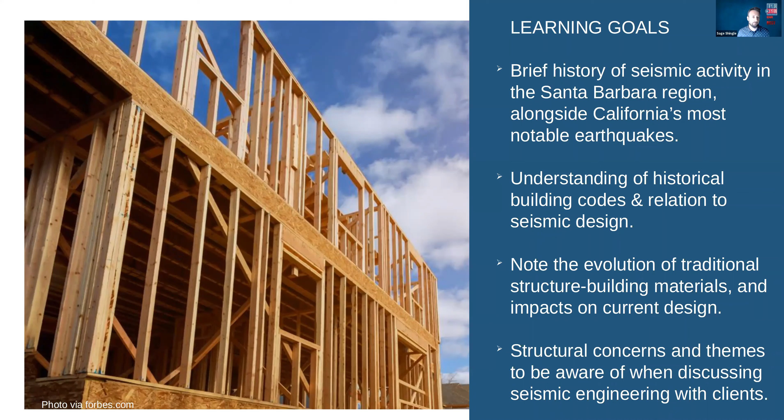So, history of Santa Barbara earthquakes, building codes, and how it can apply to your next renovation project. We'll talk about Santa Barbara earthquakes in particular, and then California's most devastating earthquakes, and how that relates to historic building codes and moving into current design, and what that's done with our building materials over the years. We'll concentrate on residential structures because there's a ton of different things we could get into, but for the sake of this, we're going to simplify and just do residential. And then just some things to be aware of and think about when talking with clients or thinking about your next renovation project.

So just a bit about me. I grew up here in Santa Barbara. I went to San Marcos High School. I went on to Cal Poly San Luis Obispo, got my degree in civil engineering. From there, I moved down to San Clemente and worked for about 4 years doing primarily, like 90%, school work. After that, I moved up to Seattle. I did quite a bit of different interesting engineering work up there. I still did a lot of schools, public projects, some large high-rise buildings, some docks, all sorts of different kind of interesting and fun stuff. While there, my wife and I also had 3 kids. About 5 years ago, we moved back to Santa Barbara, so now we're here building bamboo structures on the beaches across the area.

Throughout the last 14 years, I've been involved with this ACE mentor program. I'll touch on that a bit later, but tuck that away. And I need to acknowledge Kate Robinson, who was an intern for us this summer out of our Pasadena office. She goes to Cal Poly San Luis Obispo as well. She's doing architectural engineering, and she did the heavy lifting in terms of putting together this presentation and finding great images, and a lot of the work that she did. So I definitely have to give her some acknowledgement and thank you.

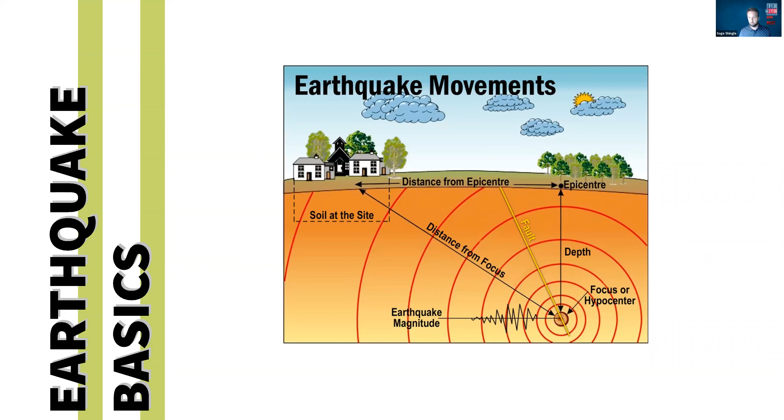So the couple different ways that people talk about earthquakes are the Richter scale, which is generally what's reported in the news, and then this modified Mercalli intensity scale, which is how geologists and engineers track the intensity. In general, in that 3 to 4 range is when you start to feel earthquakes. Below that, you don't even notice they're happening. And then we get up to the 5, 6, 7, and you start to see some damage. Obviously, the higher we get, the more damage you get, the more shaking.

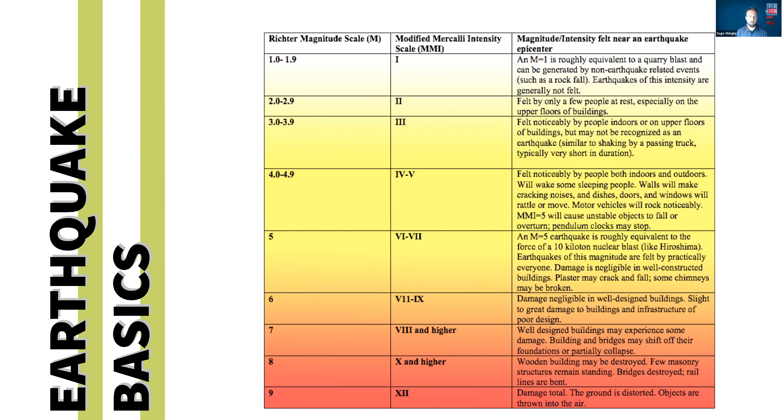Looking at this, there's a couple things that are a little bit misleading or difficult to understand about earthquakes. One is this magnitude on the left, that's the Richter scale. As you go up a notch every time, from a size 2 to a size 3 to a size 4 to a size 5 — a 3 is 10 times the magnitude of a 2. Going from 4 to 5, a 5 is 10 times the magnitude of a size 4 earthquake. That's actually physically the magnitude of the seismograph as it monitors and records the shaking.

And then on the right-hand side, you've got energy release. So energy release, just to compound things here, is that every notch up the Richter scale, you actually increase the energy released by 32 times. So going from a 3 to a 4, you're releasing 32 times more energy. Essentially, as we get up that ladder into those high 6, 7, 8 earthquakes, the amount of energy is a lot.

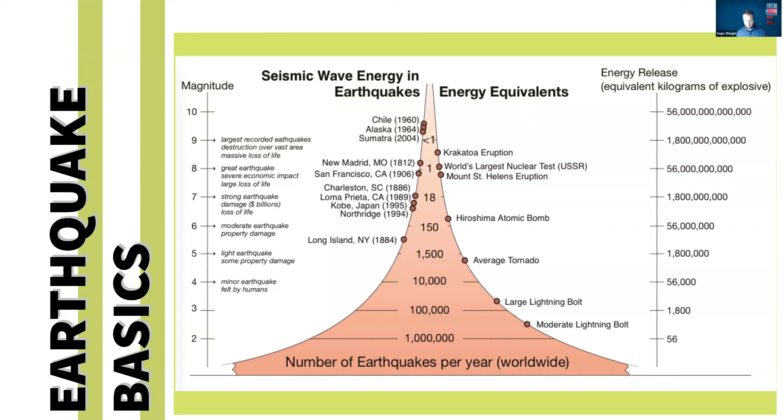So in big, global terms, everybody's heard of the Pacific Rim and the Ring of Fire, and this is the concentrated area where the majority of earthquakes happen across the world. In terms of California, we have the big Pacific Plate bumping into the North American plate and sliding.

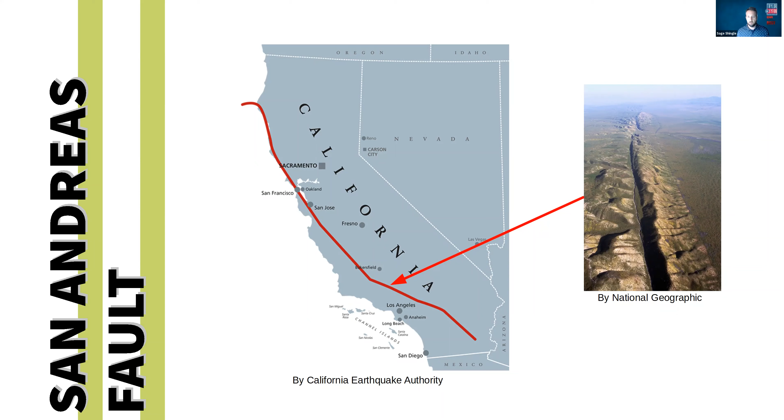So that's just one of many faults across California. We'll zoom into Santa Barbara in particular. Here's a few fault lines through Santa Barbara, and you can see they're scattered all over. They're not all active — some are potentially active, some are not seen as active, but there are certainly some in the region that are currently active. In seismic geology, anything within the last 10,000 years, any knowledge of ruptures within that period, is considered an active fault.

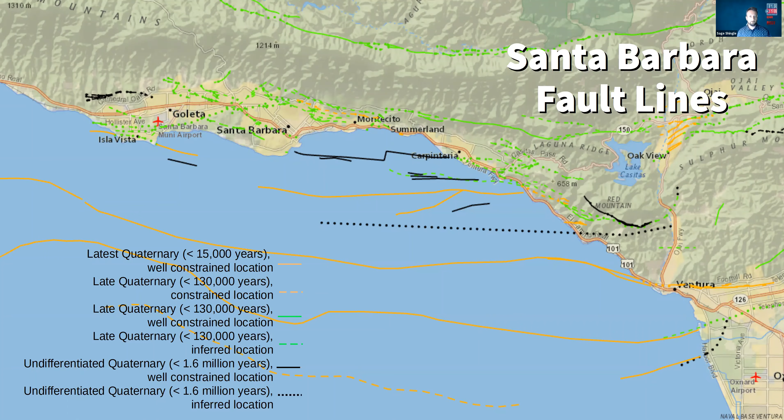Here's a few more in Santa Barbara. Zooming in a little bit closer, you can see that Santa Barbara in general — all the topography we see, the mountains, the hills, the Mesa and More Mesa — has been caused by long-term movement of the earth. So some of those hills and valleys we see, shown in green and yellow, are the anticlines and synclines of the soil and rock, and then red are faults across Santa Barbara.

And again, not all of these are active. One that is active is the Mission Ridge Fault, which is just up the top of the screen, MSR. And the last known earthquake there was in the 1700s.

One important takeaway is that all of the faults around Santa Barbara have a certain length, and that length and the potential for rupture dictates what size of earthquake we can expect. With a length of about 10-12 miles, the Mission Ridge Fault could generate roughly a 6.5 magnitude earthquake. There are other faults off-screen that can generate earthquakes in that same range, up to maybe a 7.5.

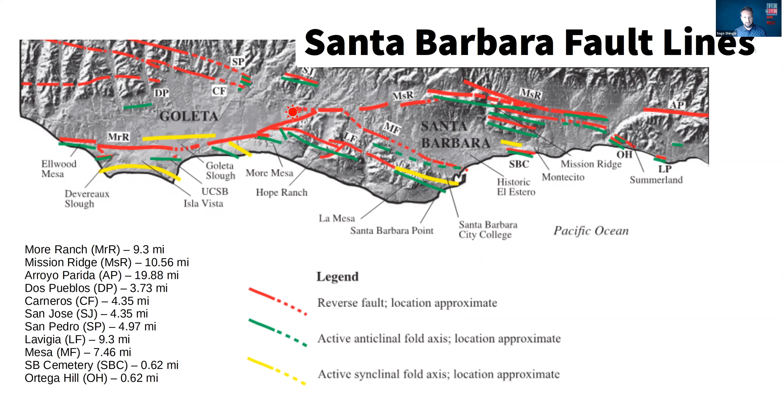Other things that are important for any of you I recognize - when you see me walking around with my wife, that star that just dropped, that's my home, so we're close to some faults or potential faults. When you see me walk around with my wife, don't mention it - it's easier that way, so she doesn't have to worry about it.

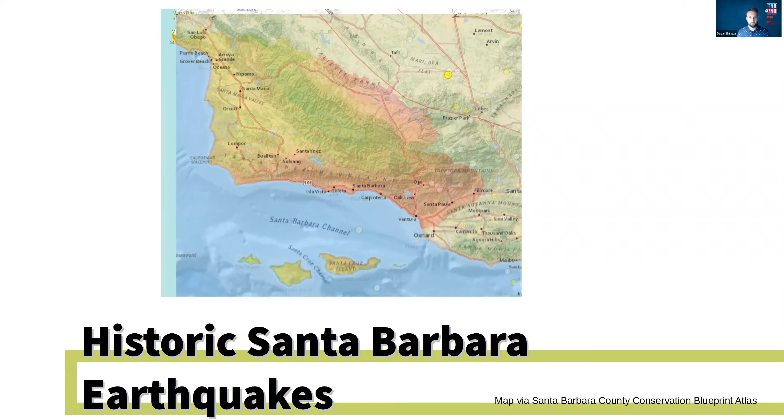Going back to older earthquakes in Santa Barbara, we have the 1812 earthquake. Before anyone jumps on me about the photos not being from that era - if you're an architectural historian - these are from more recent photos because not as many people had their phones out to document everything in the 1800s, imagine that. What was around at that time were missions across the coast. La Purisima in Lompoc got more or less completely destroyed - they actually moved and rebuilt on a new site. The Santa Barbara mission had damage, Santa Ynez mission had damage, the Buenaventura mission had damage.

Taking the swath of damage and doing some back-calculating, they found that this earthquake was in the order of 7.1 magnitude.

The big one we all know about here in Santa Barbara is the 1925 earthquake, and this is significant for a couple of reasons. Architecturally, it reformed the way we think about Santa Barbara now. It was also one of the triggers to start considering seismic design in the Uniform Building Code.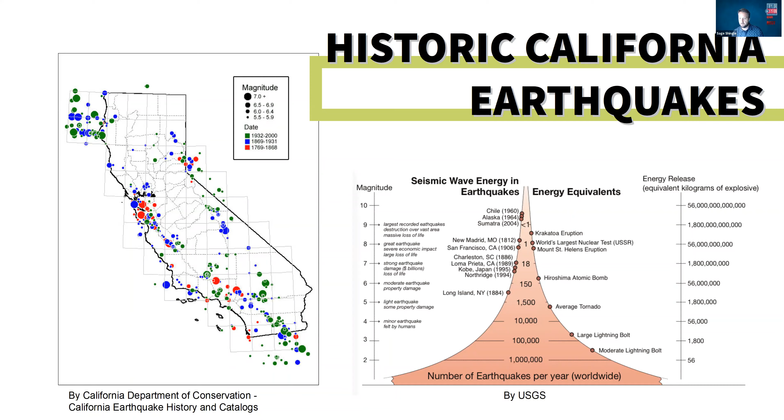So just real quickly talking about seismic design factors, we start to realize all of these different things are important. How much does the building weigh? What type of lateral system is supporting it? Where is it located? How close to faults are we? And then an importance factor, as we recognize the importance of those other things, or recognition that we need to take care of specific buildings, whether it's an important infrastructure project, an emergency medical office, a hospital, or an ag building.

So history of seismic design, we're going to strum through this pretty quick. 1906 San Francisco earthquake, 1933 Long Beach earthquake, 1935 UBC, and actually the 1927 UBC, which is just after the Santa Barbara earthquake. The 27 UBC was the first time we actually mentioned seismic design, starting to think about it in terms of a weight and then designing for a portion of that weight as seismic.

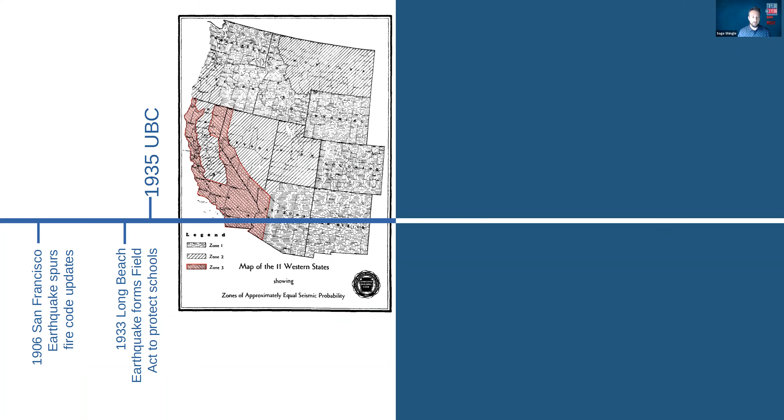So 1935, this was the first seismic map that we had, showing in red there, pink, zone 3, which would be the high zones.

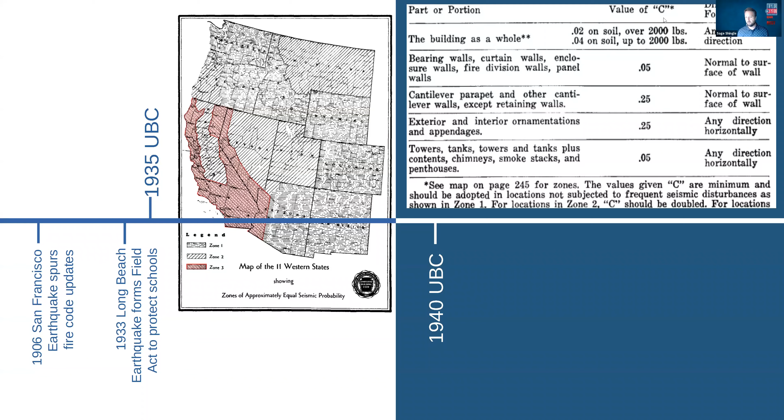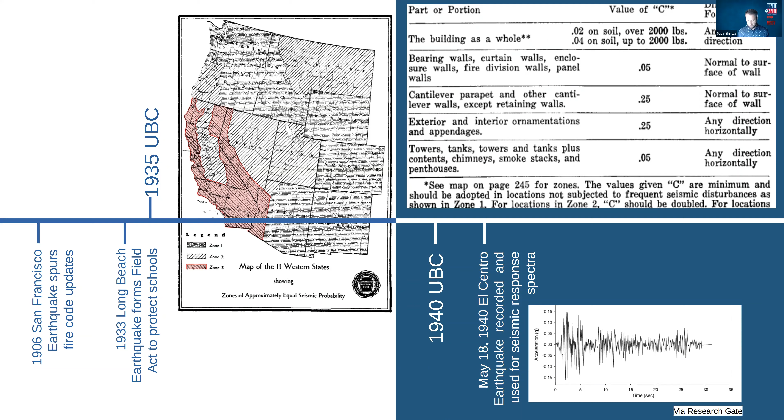1940, so we have an earthquake. Now this is saying, up at the very top, basically that value of C is multiplied by your weight. So at this point, we're saying 4% of your weight is what we want to design an earthquake for. 1940 is the El Centro earthquake, which is a big earthquake because that was the first earthquake that was actually recorded via seismographs in near source.

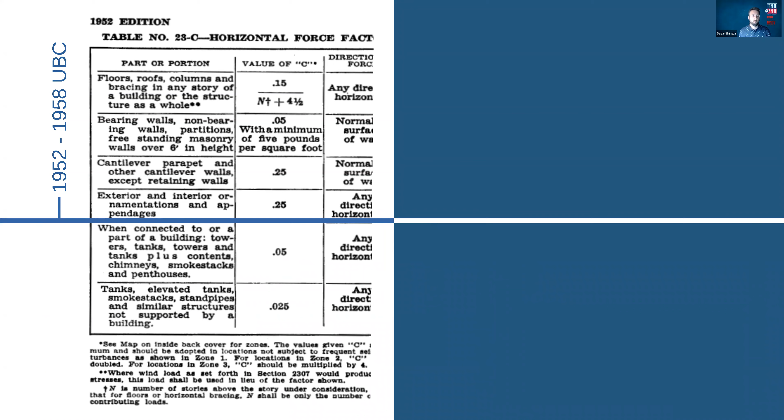So we learned a lot about that earthquake, and that recording still dictates a lot of design. In '46 there were some changes to that. In the 1950s, this value of C, in that middle column there, changes a little bit, but it's basically the same thing. We're multiplying our weight of the building times some coefficient.

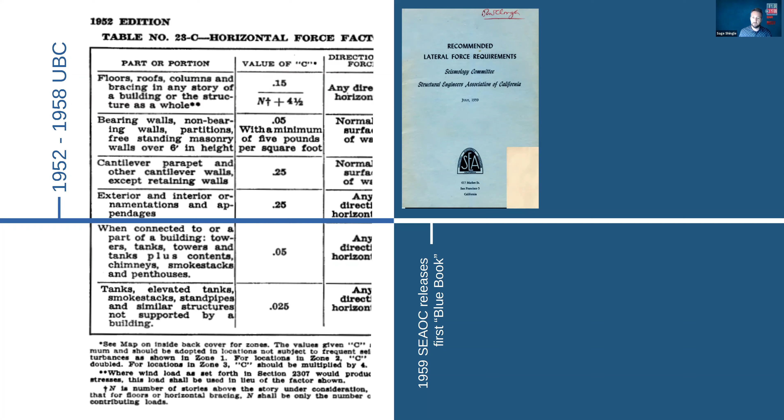That we've learned a little bit more about, and we feel a little bit better about this equation. In 1959, we get the first seismology recommendations from the Structural Engineers Association, and they've been updating these to date. So this is the first time that the Blue Book was issued, 1959.

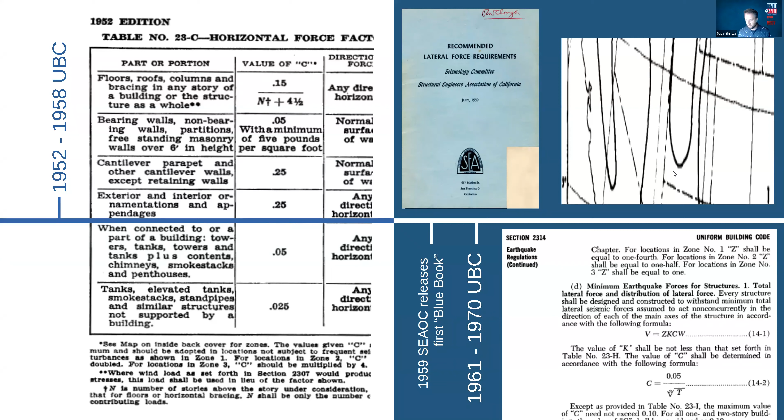1960s and 70s, again our kind of earthquake equation. I apologize for that image on the right, it didn't come in quite how I was hoping. But the equation there, 14.1, V, that's your seismic force. Z, K, C, those are different factors that we're combining in to account for how much earthquake design force we should have. W is just the weight of the building. So we're evolving these as we continue to understand.

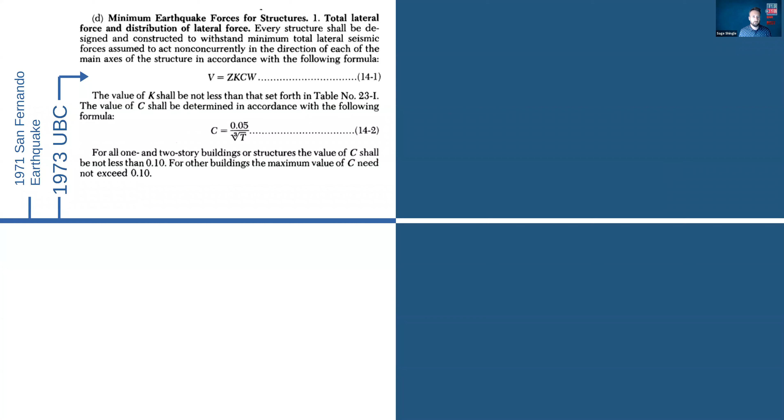So 1971, San Fernando earthquake. Again, we're just evolving. It's that same equation we just looked at, but we're starting to evolve that a little bit further, putting in some minimums. Further into the 70s and 80s, we talk about more minimums and some importance factor now in there. And that's kind of a direct result of that Sylmar earthquake.

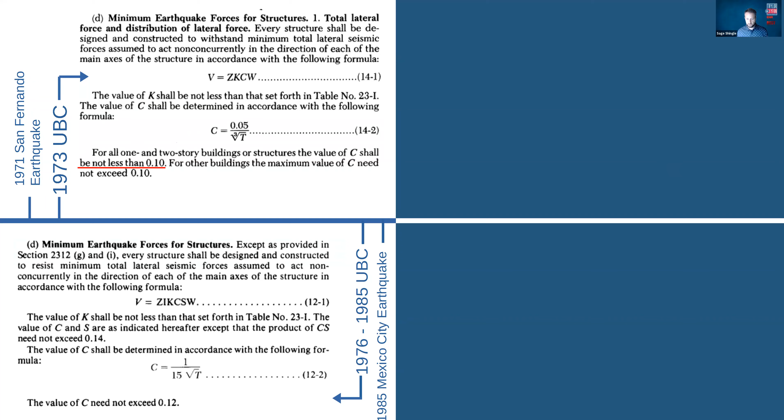And again, you'll see these forces are essentially increasing. 1985, stepping out of California for a minute, was a big earthquake, and there's a lot of unreinforced masonry and liquefaction, and that directly led into the 1986 California Earthquake Hazards Reduction Act, which then led into the hazards reduction that Santa Barbara did. So unreinforced masonry structures that in the 90s we went through. And if you go to San Luis Obispo today, there's plaques on buildings that say this is an unreinforced masonry building, and it may not perform well in an earthquake.

1989, Loma Prieta, so liquefaction and soft stories we paid attention to. There's where that Seismic Hazards Mapping Act came from. 90s, early 90s UBC, so we again have kind of evolved to that basic equation of multiplying something by the weight and coming up with a value to design for.

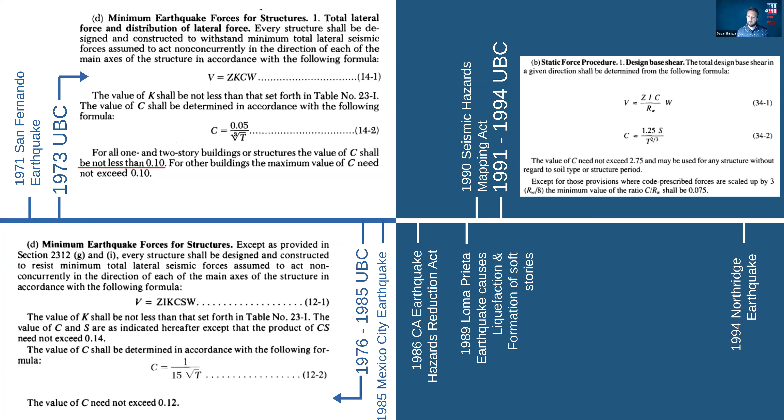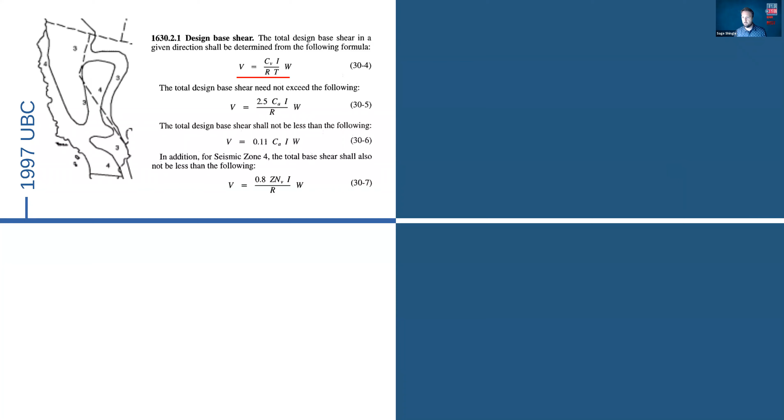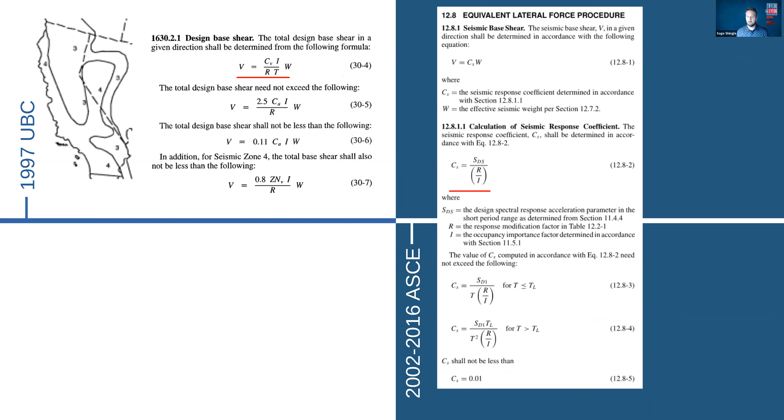And then we come to the Northridge earthquake. The Northridge earthquake was really kind of a big change in terms of near source. So we recognize that being close to faults has an impact on the level of design forces. So again, we've kind of evolved these equations, but the basics are still there. We're taking a portion of the building weight and applying it as a lateral force.

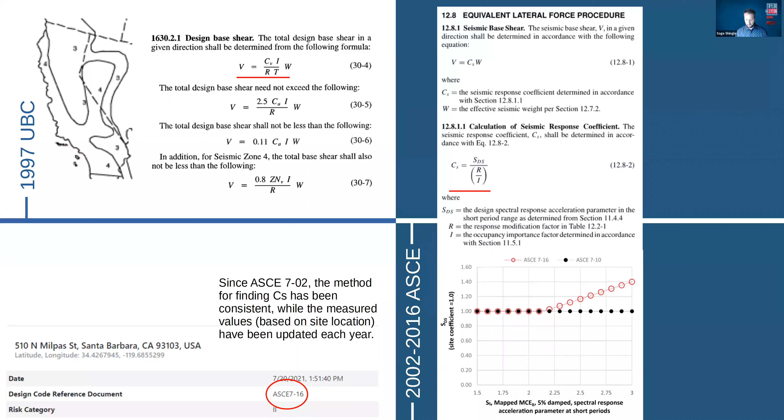In the 2000s we've still had changes, and we'll see in just a minute how this kind of evolved. So now plotting our years, our time across the bottom, and then the C sub S coefficient - that's what we currently call it, but it's basically the coefficient that we're multiplying our weight by. You'll see it's directly proportional to the weight of the building. It's the force that we're designing for.

Early on, we had no design forces, and then we have the 1933 Long Beach earthquake, and we realized we need to design for earthquakes. As we learn more, we start to design for higher forces. I've kind of broken it out - we've got a blue line and a red line. Red line being low seismic areas, blue line being Santa Barbara, or more generally a high seismic area. As you recall from that first map we saw, we were all lumped into one big seismic zone - now we'd call it a seismic design category. So we've learned a bit more, and forces have gone up. That's the first blue book I mentioned, so we designed for structure type at that point.

Then we get a little bit further, our forces continue to go up. We're learning more - I kind of like to refer to this as a battle of man versus nature. We're learning more about nature and trying to adapt to it, and this is kind of the result. All you can ask is that we're learning more and more. You can see a break there from San Luis Obispo - I think it must have become a separate zone, then it joined back up.

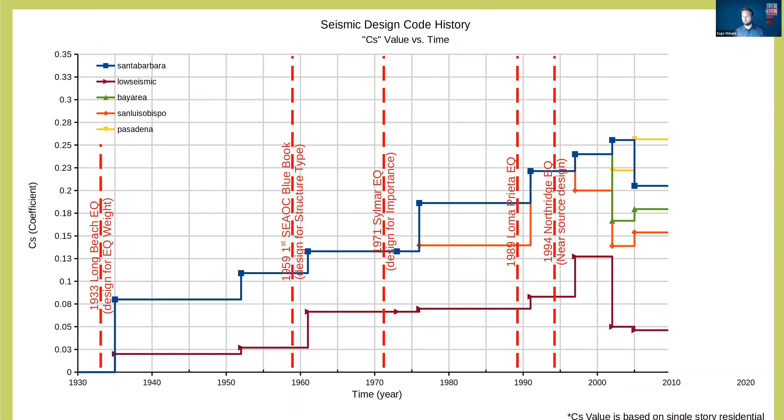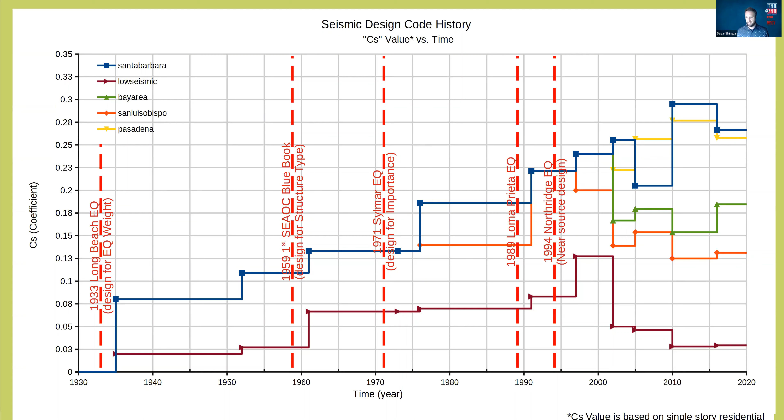Based on Northridge, we did some near-source and site-specific reactions. So now, for Bay Area, San Luis Obispo, Pasadena, you can put in a specific location and identify what accelerations you're expecting to see. You can see it's jumping all over, which has to do with seismologists recognizing different things we're learning more about earthquakes, and there's a probability to it - at a given site, there's a probability of an earthquake happening from fault A, and a probability from fault B, then C and D. All these probabilities work into the accelerations we take and use for design. You can see how complicated it's gotten in the last few decades.

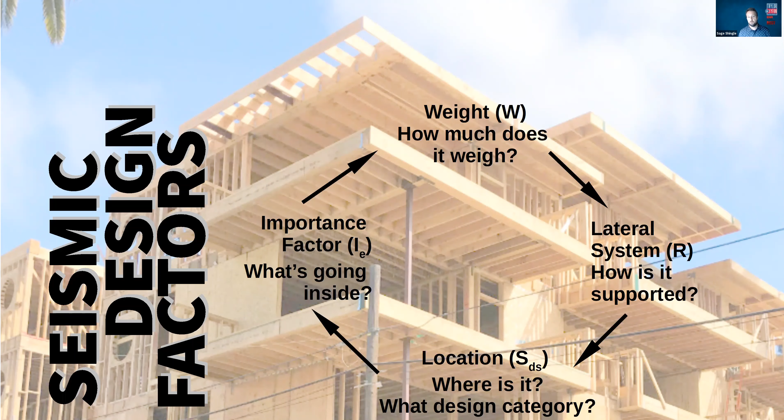So again, just touching back on these - weight is a hugely important thing. The lateral system - what is it, and how has it evolved? Where is it - how close are we to a seismic source? And the importance factor - is it a critical structure?

So, lateral systems - we're just going to look real quickly at timber structures, because there's a whole lot under this umbrella and we don't have much time. We do a lot of residential buildings here in Santa Barbara.

In the early 1900s, there's not a lot going on - there were no rules as to what to do. So taking a typical 1,800 square foot home, putting a roof weight on it and some walls, we get a total weight - say the building weighs 54 kips. We have a pretty low C sub S factor, which we saw was down at the low end before we grew and grew. That gets you maybe 2,000 pounds per side of the building if we distribute it out. So you might see some let-in braces, but nothing much special.

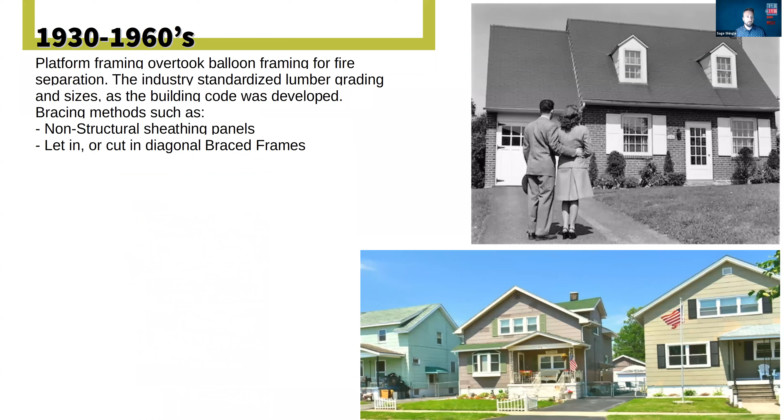Generally, sill plates were minorly anchored, so you can expect not to see much. In the 1960s, we saw a little bit of development, with some increase in forces like we just walked through. Same weight of the building, increase in force. Now we're up to about 3,500 pounds.

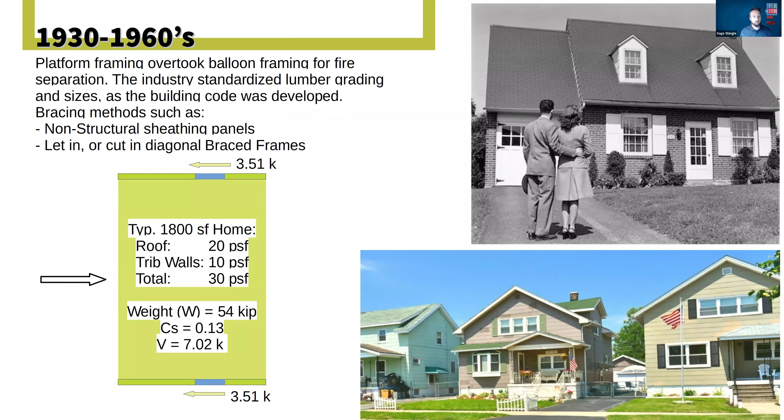And again, you might see some sheathing at this point, but more likely you see some let-in braces. There is some anchoring, but not to current standards or spacings. There is some use of hold-downs, but not widespread.

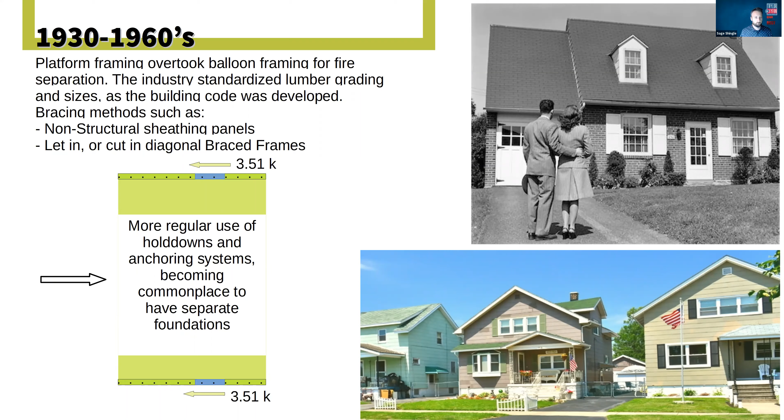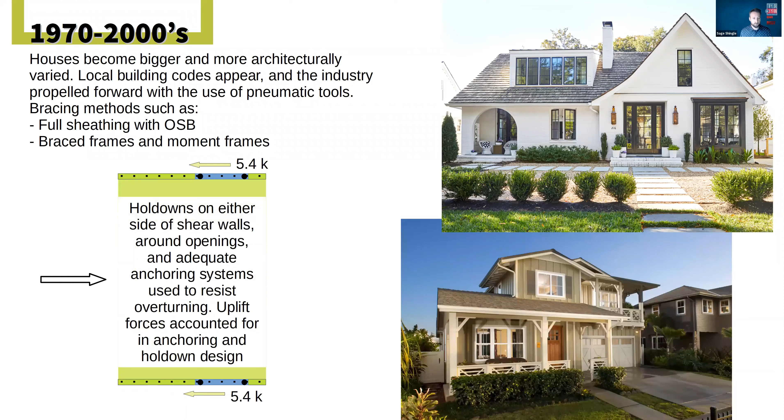More recently, we're using OSB and other systems if we need them on more unique homes. Same building, we now have up to 5.4 kips. We expect that there's going to be regular sheathing, hold-downs, and anchor bolts.

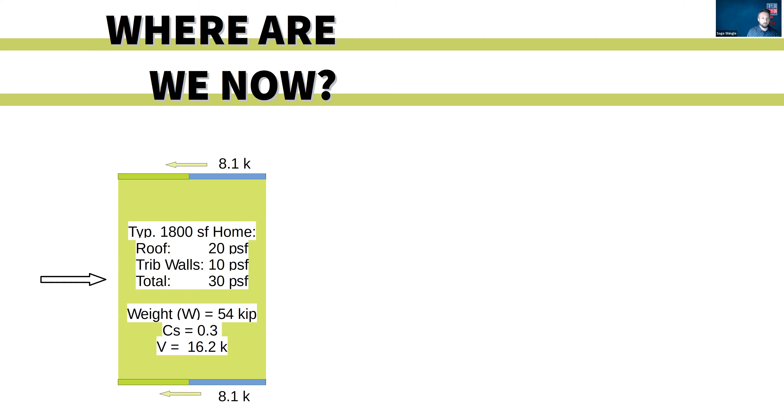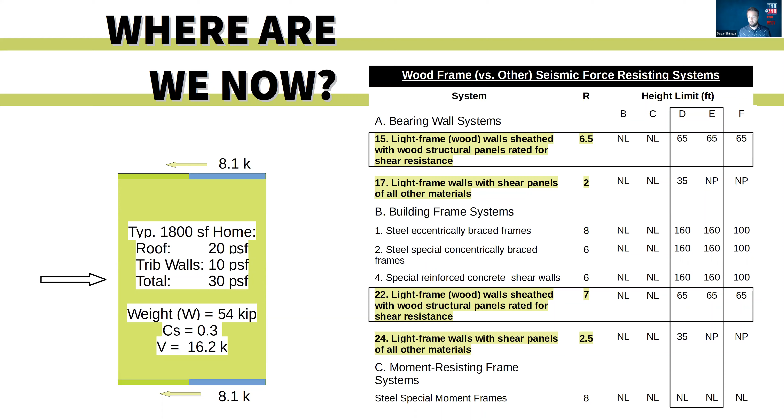Light frame walls with shear panels of other materials are not permitted anymore, so we're not even able to use those materials. Not that we would want to.

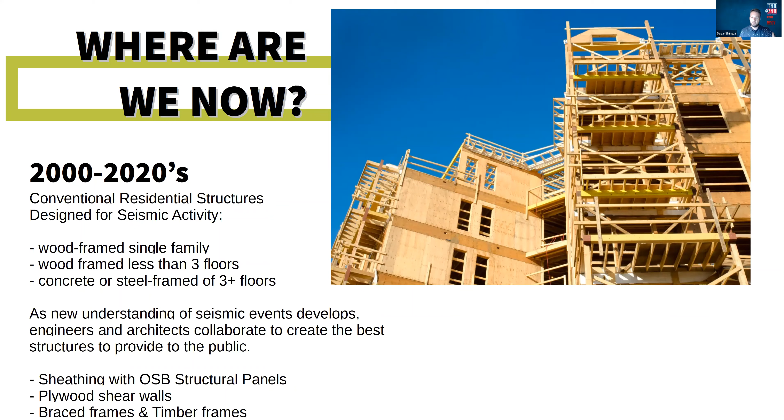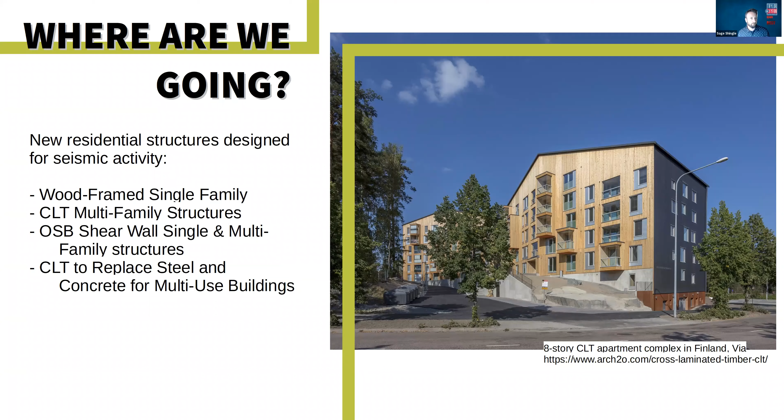So we've been in multi-story buildings now using plywood sheathing and multi-story anchor devices. But that keeps growing and growing—now in places like Seattle and more urban areas, those buildings are going to 75 feet and 5 or even 6 stories of wood. We're starting to use cross-laminated timber, keeping with the wood theme—that's a potential replacement for concrete in some multi-use, mixed-use buildings.

Okay, I've got a few more minutes here. What to take away in client discussions—this is something that is kind of interesting in how it's implied.

If we design something for a current building code, the implication may be, for a client or someone who doesn't know, that there's not going to be any damage to the structure—that we've designed this building for the current building code, so it's going to be perfectly fine. Well, the reality is that it's designed for life safety, and that goes into a bit of economics and the reality of being able to design for something to be operational or immediately occupiable.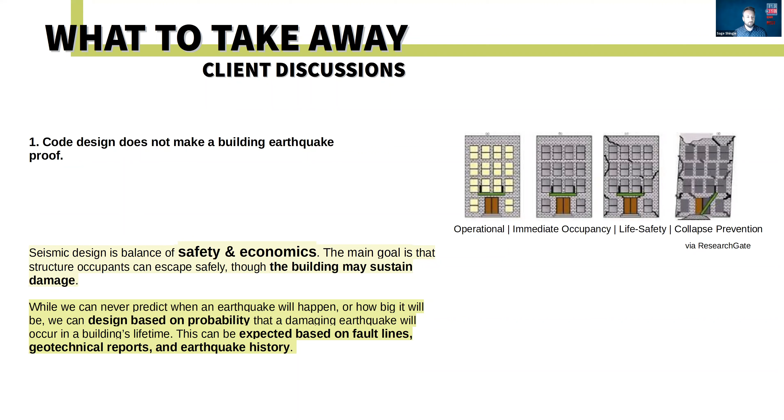So in an earthquake, we can expect that there's going to be damage to buildings. That being said, typical residences perform really well—there's a lot of redundancy in walls, a lot of actual ductility, dissipation of energy, nailed connections and things. But you can certainly expect to see damage, and that's one of the things that's just important to remember and think about.

Another thing to think about when talking about these types of buildings or new renovation projects are known hazards. We've had this long history of failures, and they're all very similar—we've learned the lessons, but applying them is another thing.

In terms of residences, the typical failure we see would be cripple walls—a cripple wall underneath the first floor, maybe 24 inches tall or so to get under a crawl space. Generally those aren't braced as well as the building itself, so you're going to see movement down there, and the house can fall off of that. It's a really quick and simple thing to sheathe that underside and make sure you're supporting that first floor. And then another one is soft stories.

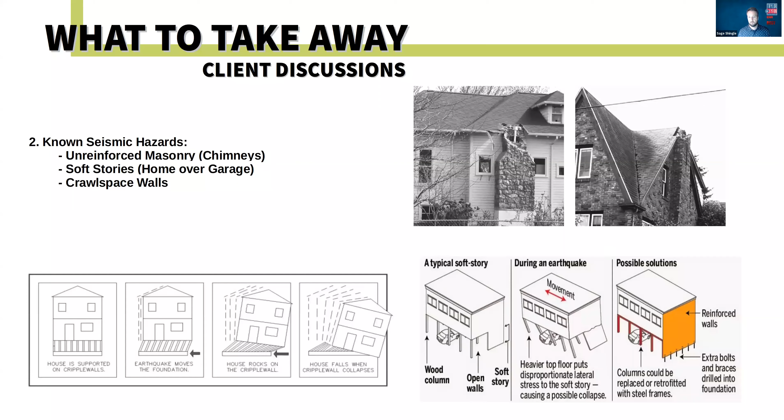These are kind of big topics here, but in general, the triggering of seismic or gravity kind of improvements. So the rule is, if you're altering an existing structure and you're increasing the dead or live load more than 5%, you need to justify the existing gravity system for existing or current loads. That may be putting a roof deck on top of a garage, or putting Spanish tiles on an asphalt shingle roof.

Important thing to think is you can consider both dead load and live load. So if you're minimally increasing dead load, it may not push that 5% trigger, but 5% is not a big number. So that's something to kind of be aware of, that this action could force some increase.

Now, the bigger thing, especially here in Santa Barbara, is lateral load, and the big dollars come into a renovation when we start to get into seismic increases. So increasing by more than 10%, that's saying the demand to capacity ratio of any element is less than 10%. If you can keep under that 10%, then you aren't forced to make improvements.

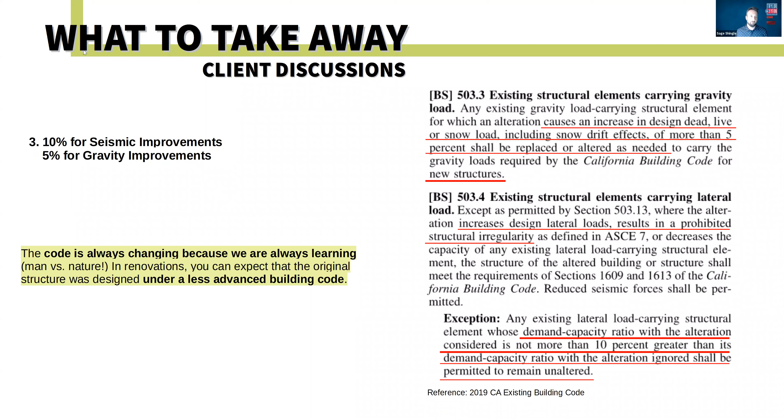And we want to make sure we're updating to the current building code. We're adding plywood sheathing, we're adding hold downs, goes into this, so what does it take to actually update a wall? So generally speaking, an older building, you're going to have a 2x sill plate with minimal anchors.

And what it takes to update to a plywood shear wall is, anything other than 6-inch nailing, and we need 3x nailers at panel joints and sill, which means you could use a double 2x instead of a 3x. So you'd be getting new studs every 4 feet to get the panel edges. You'd be getting new blocking in the wall, which there probably was nothing there to begin with. You'd be adding a 2x sill on top of the existing sill and adding anchor bolts along the whole length. And you'd be adding hold downs likely.

Now, that's in my mind, that's where the big money comes in, is the concrete work and the hold downs. And as we've been evolving this seismic understanding, material understanding has kind of evolved along with it. And in the last 15 or so years, anchoring to concrete has just gotten a lot more difficult.

And what it requires is that for seismic components, where the primary force is seismic, a hold down is exactly that. You can anchor to concrete, but that anchor needs to be ductile, or you need to design for an overstrength factor. And there's kind of a lot of things going on, but the gist of it is it can be really very difficult.

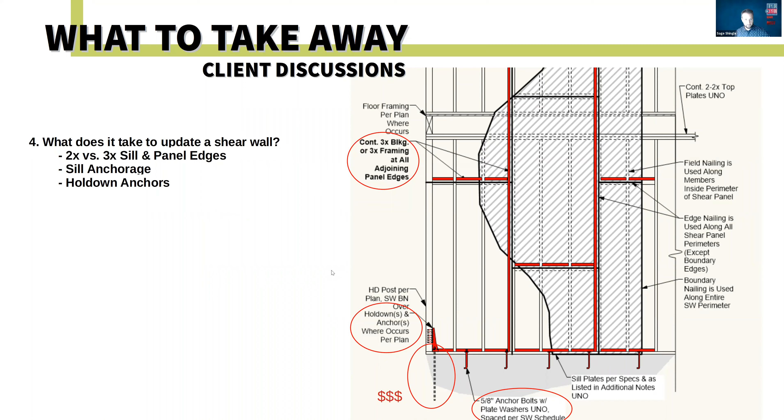To get the capacities you need out of existing concrete, which sometimes means that you have to drill down and go through and anchor to the underside of the footing or supplement the footing to strengthen the footing. But that, I think, is kind of the most complicated part of shear wall updates.

This I would probably cross out - client discussions - because this is kind of complicated, but something just for you to be aware of.

As we've learned more through the years, we recognize there are different types of irregularities in buildings, both horizontal and vertical irregularities in the lateral load path that complicate the design and create sticking points for load concentrations. We need to pay attention to these. Now the current building code gives direction on each of these things, and actually specifically limits some of them. For example, in seismic design category D and E, you cannot have a weak story at the bottom - like a shear wall with a little eye in the middle - for good reason.

This other one, a lateral offset, is something we see a lot in Santa Barbara - when the primary shear wall is in the exterior of the building going up, and then it steps back and moves inside.

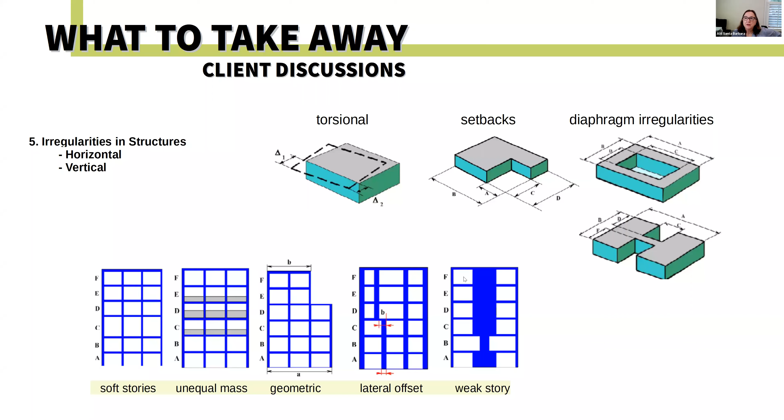Quick sidebar on the ACE mentoring program - this is a program in Santa Barbara, but it's across the U.S. There are 70 affiliates, 10,000 students, and 4,000 mentors across the US. I did this when I was up in Seattle. We basically concentrate on getting high school students exposed to the disciplines of architecture, construction, and engineering, and we're gearing up to start a fresh, maybe remote year here.

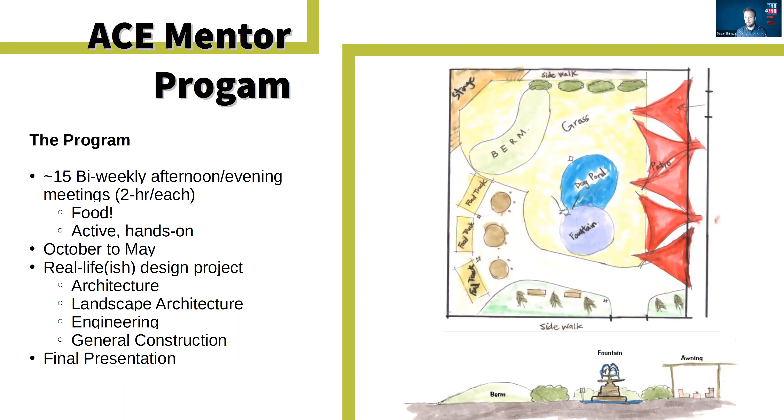What it involves is meeting with students over the course of the year - we do a real-life-ish project, let them get their hands on building materials and design materials, and help them through the process as mentors, having them give a final presentation. If you're interested, you can get in touch with me, or Tara can relay that. There are definitely different ways you can be involved. That's it.